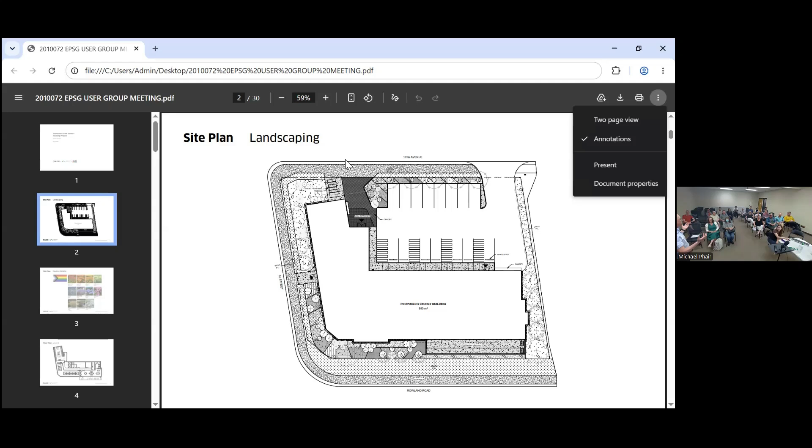For those that don't know me, I'm Jonathan Rockliff with Dialog, a registered architect, and I've got Tegan, a designer, with me today - she's been heavily involved in producing a lot of the design work. I've also got Ty here, who's a partner in charge of the project. Between the three of us, we can answer probably any questions you might have. What we're looking at first is the current site plan, showing the footprint of the building. As people know, we've got roads on three sides - it's kind of a unique site that way.

We did find out recently that we fall within the corridors area, which has some additional landscaping requirements that we're kind of stick handling right now with the city.

The idea is, I think we have a colored landscape plan coming up? We don't have a colored plan, but we have some images of the planting scheme.

Quickly, in terms of the site plan, the building is kind of this L shape. We've got the main entrance facing 101A Avenue, limited parking but some parking to the north, and the site is quite sloped, as everybody knows, and we'll see it later in the design.

As you go from the north to the south, how many meters difference? About 2 meters, I think. Yeah, so that's 7 feet or so from front to back.

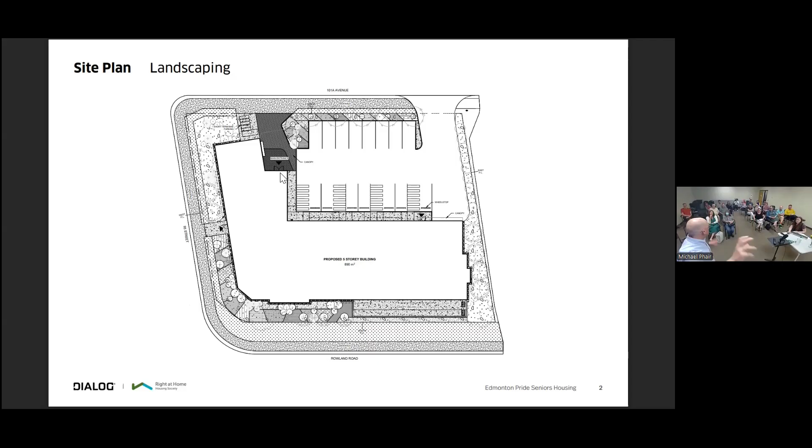We've got the main entrance into the building, a bit of an entrance plaza where we thought we'd get some seating in there and some planting. We've got some bicycle parking, which is a requirement by the city, adjacent to the front entrance.

As you come around the building, it's hard to see, but there's bigger trees and bushes and some landscape buffer between the streets and the building of different shapes and sizes. We've got a fire exit along 95th Street, and there's an outdoor amenity area just to the south in the lower level, to the southeast of the property.

Will the development permit dictate the landscaping? The zoning dictates the landscaping, so there's a requirement for trees and number of trees. They won't say exactly what needs to be planted.

I don't believe they indicate the species, but they might say like this many coniferous trees or deciduous trees. Our landscape plan that will be submitted to the city as part of the development permit will be our opportunity to propose how many of what will be planted where, and then that becomes what we get the permit on, so they'll come back and look for it.

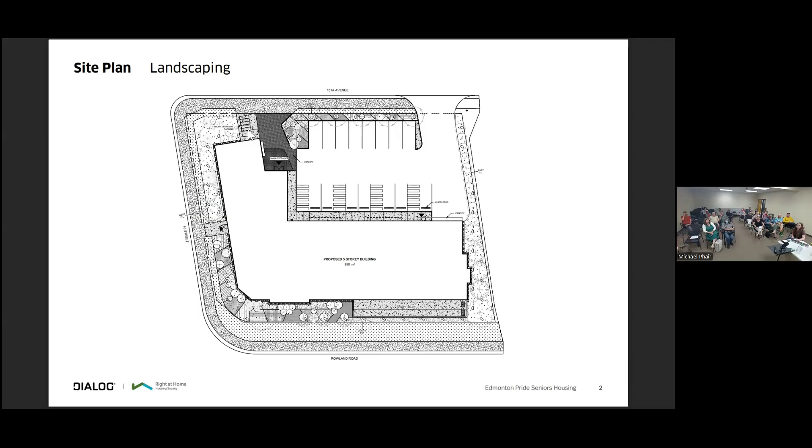So that's kind of the building footprint and the site plan, and we talked about the landscaping. Here is what we're calling the lower level, not the basement, because of the slope of the site we have a walkout basement. For the most part everything's underground, except for the area where we've got what we're calling the common amenity area, which is essentially a big multi-purpose room with a kitchenette, some bathrooms, some storage, and a sizable exterior space directly accessible from that. It faces south, so lots of sun. We're aware it's going to be adjacent to a busy road, so we've thought about fencing for security, but also privacy.

Is this your bike parking? Yes, so this space up here is dedicated to bike parking. You can see all the little stalls required for smaller bikes and bigger bikes, and this is in order to meet the zoning requirements.

Common on each floor is two elevators and a bit of a lobby space, and you'll see more about how that works as you get above the main floor. We've got a large storage area over here, some mechanical and electrical spaces in the middle, and a couple of exit stairs.

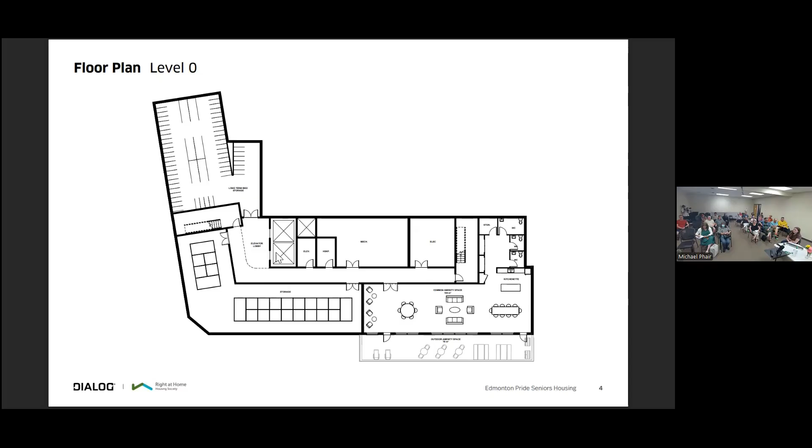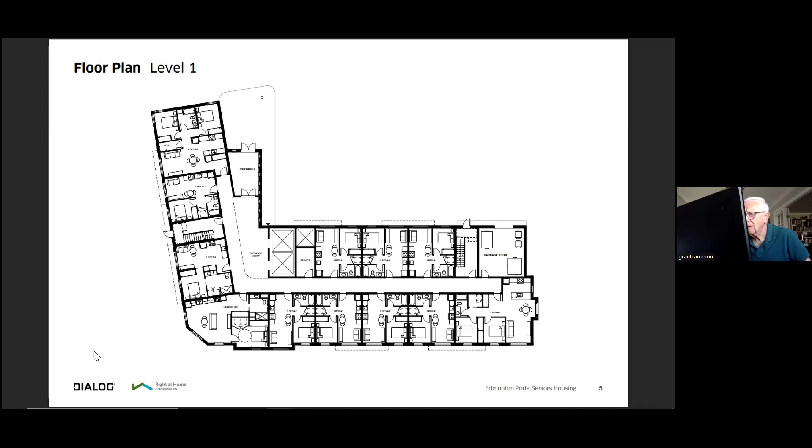All right, next level. Did someone online have a question? How does one see the slides, I'm not seeing them at all. Anyone else online? Yeah, we can see them, they're on the screen. If you go to speaker view, you'll be able to see it and then go to full screen. Okay, and where is that? It looks like a little stack of 9 squares. Speaker view - are you seeing all of us right now? I'm seeing the whole room. Okay, at least I was. You should - so they shared this screen. Yeah.

Well, maybe I'll keep going while you're figuring out your tech, if that's okay. Okay.

I don't know if we want to share these drawings after the meeting, but I guess we're okay with that. I think we're fine with sharing some generic ones as long as everyone understands we still haven't made it through development permit and building permit, so there may be changes as they identify issues. They're your guys' kind of drawings, but as long as we understand we may have to make tweaks and changes along the way, it'll give you the general idea of what we're aiming for.

So here we've got the main floor, and the main entrance coming in from the north. There's a nice size canopy over the front entrance just for shelter, and we've pretty much used every square inch of the space available to create suites - mostly suites. Maybe you can hover your mouse.

One of the requirements from the city was a garbage room, not exterior garbage. So in the northeast part of the building we've got a garbage room. On garbage day the truck will pull up, open the door, pull the bins out, empty them, put them back in. I think Right at Home is actually happy about that, from a safety, security, maintenance point of view as well.

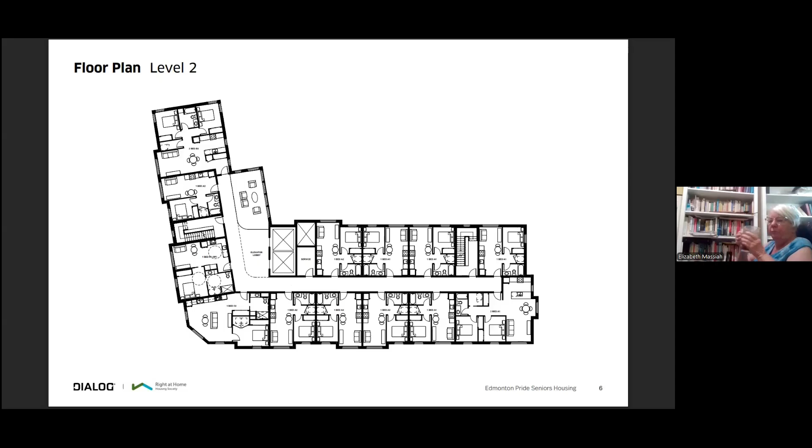Can you just tell us basically what the size of the suites will be? So it varies, but we have that on some upcoming slides, and we have a square footage of each suite type. But I guess the idea is on the upper floors, elevators are going to be a place where people come and go in and out of the building. That lounge area has a nice adjacency to that space, so I think it'll be an interesting, active space. There'll be windows to bring in natural light, not just to the lounge area, but into the core of the building where the elevators are.

As Tegan mentioned, when we look at the exterior of the building, you'll see we've extended out portions of it, and that does a couple of things. It provides a bit more space for the suites, and in some cases we needed that extra space, but it also helps create some visual interest on the exterior of the building.

So they have balconies? No balconies, no.

So I guess we can probably go to the exterior. So Jonathan, the size of the different units, how big are they - the one bedroom and the two bedroom, is that on an upcoming slide? We'll hit that, yeah.

Can I just, on the topic of balconies - one of the things we considered in this design was larger lobby areas and community space, encouraging people to get out of their suites where we've got those sitting spaces. Balconies, especially if anybody's watched the weather lately, can be not a fantastic space to use. Summer now we have all this rain, winter it snows, it's cold. So creating these spaces, whether on every floor or the main one in the basement, is usable 365 days a year. It doesn't matter what the weather is.

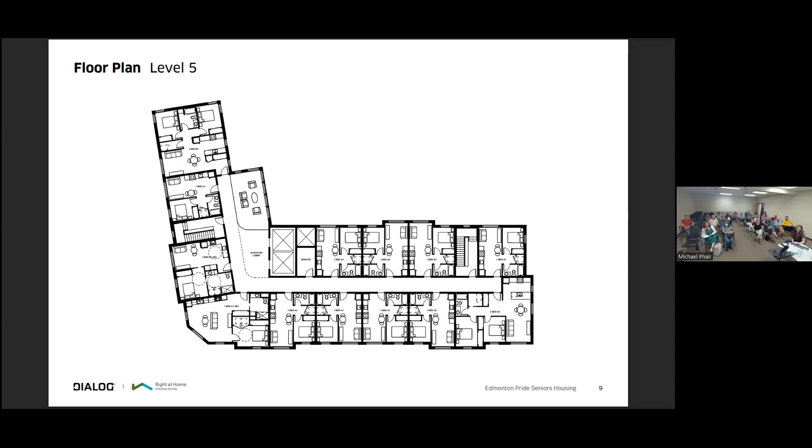Because we're getting money from the government, there's a requirement in the building code to provide adaptable dwelling units—kind of like barrier-free suites, but they don't have to be built barrier-free. They just have to have the ability to become barrier-free if needed, so we have 7 of them in the building.

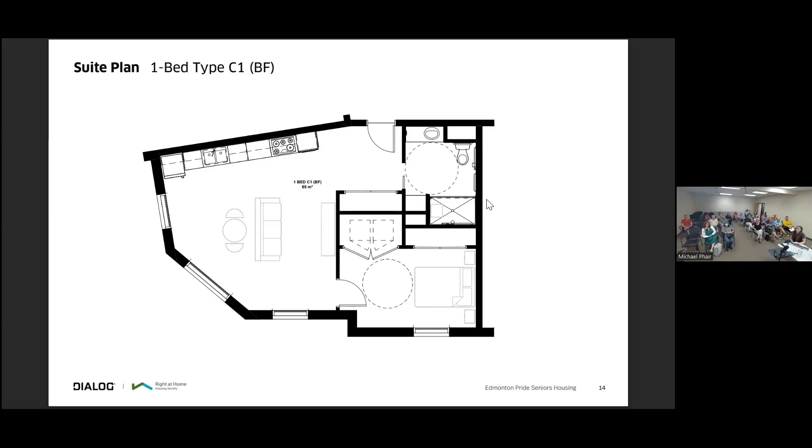Okay, this will probably be the suite everybody will want—this is the corner unit with lots of windows. Yeah, a bit of an odd shape, but... I can't remember, is this the same all the way up?

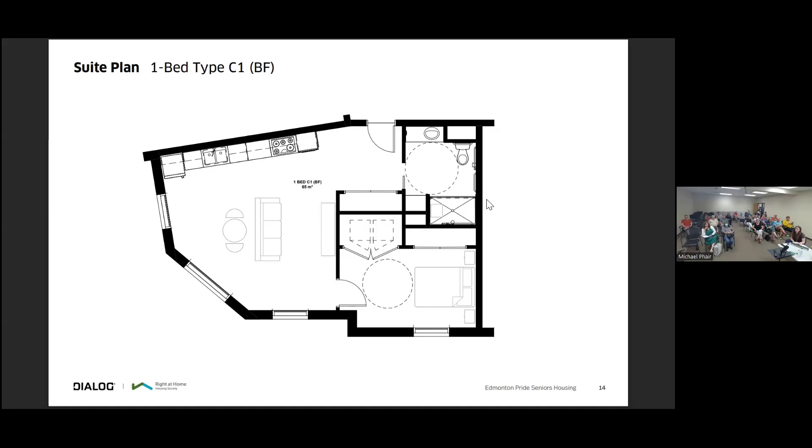There are some barrier-free versions and some non-barrier-free versions. Currently the layouts are the same, but we might change that. What was the square footage of this one? This one is 65 square meters, so approximately 650—675 square feet. Thank you. And yeah, there's a nice big closet as you come in, right there. Same layout.

Here's our two-bedroom. It's in the southeast part of the building, so it benefits from two exterior walls and lots of light. This one has a storage room where we would put the stacked washer dryer. Do any of those windows open? Yes, albeit building code limits it to 4 inches of actual opening space.

They could be sliders, they could be swinging, but can't have more than 4 inches of open space—you don't want anyone to fall out. Yeah, it's kind of a... wow.

We are putting air conditioning in the building though. Oh, perfect, so you're not reliant on your windows for cool air. That's nice, I was like, I don't think you're super worried—unless you could climb out that window later.

Air conditioning in the building - in the suites as well, or just the hallways and common areas? We are still value engineering the mechanical, but we are working towards making it nicely acclimatized for folks.

What's the square footage on this one? This is about 72 square meters. And how many of those units are we going to have? We have 5.

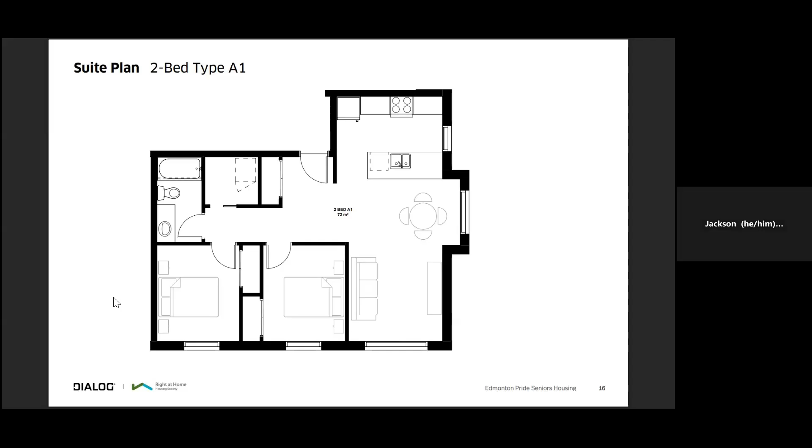Because, I mean, not to call out Michael, but Michael's not the tallest person in the room. So I'd be wondering, especially because common injuries are shoulder or hip injuries, so the clearance to pull stuff out of the dryer would render a stacking washer dryer useless if you can't reach it. Yeah.

That's great feedback, we'll make note of that mentally for when we start to select the appliances. Thank you. I guess on that note, I think all the suites have dishwashers. Yeah, that's common - all suites have a dishwasher.

Marisa, would you be able to touch on it all? I think one of the things is we've tried to provide a range of unit sizes and unit types here, going from very compact to larger, more market type sizes. I don't know if you'd be a good person to expand on the relationship between affordability and square footage a little bit, and why we tried to come up with a mix.

Well, there are 1.5 million reasons we try to come up with a mix, but at the end of the day, when applying for grant funding, there are caps on the dollar per square foot, dollar per unit, and dollar per build. So we need to be cognizant of that when the province is funding affordable housing - they're maybe not funding executive suites. But in a mixed market building where we want to attract people who want affordable housing as well as regular housing, we try to be thoughtful about not making them too different, but also having some variety.

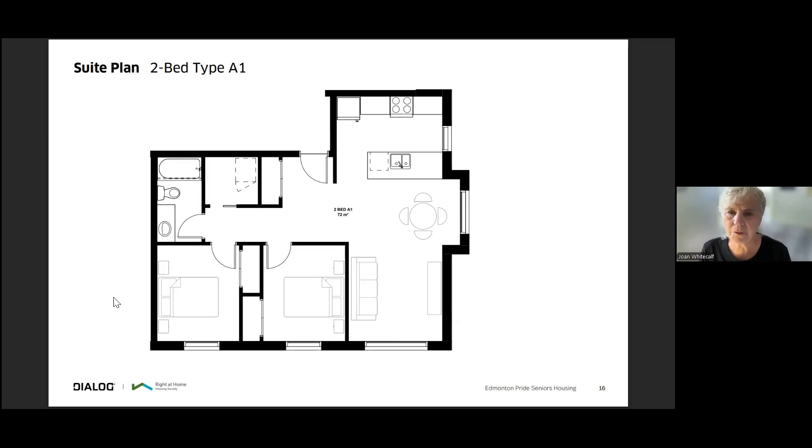In every suite, or just some? It depends on the design—like the one that's up now, you can see there's a pocket door on the laundry room, I think in the barrier-free suite. The barrier-free suite has them. For bathrooms, we find that people really don't want a pocket or sliding door for privacy, because you hear absolutely everything. And for bedrooms, folks tend not to prefer those as well, but we have placed a few. Okay, yeah, thank you.

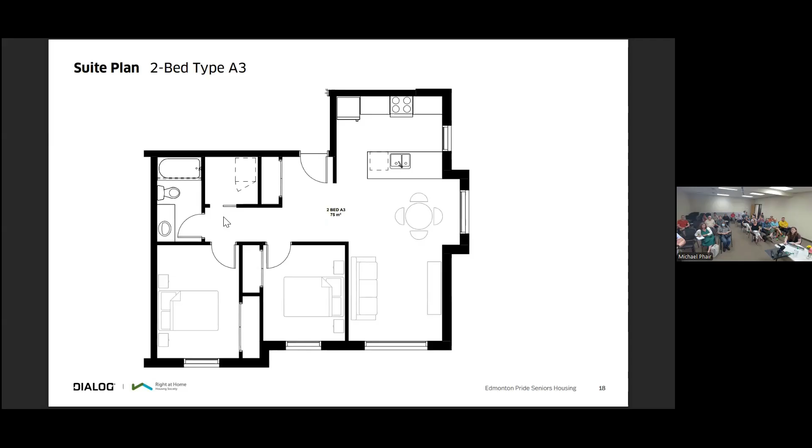It's 5:45 p.m. Okay, what time do we have until? You're done in 25 minutes, but yeah. Hang on, we can shave some time off. Sage is very, very kind and generous, they support us greatly, but there is a volunteer sitting upstairs waiting for you to leave. So if you could leave by 10 after 6, that would be wonderful.

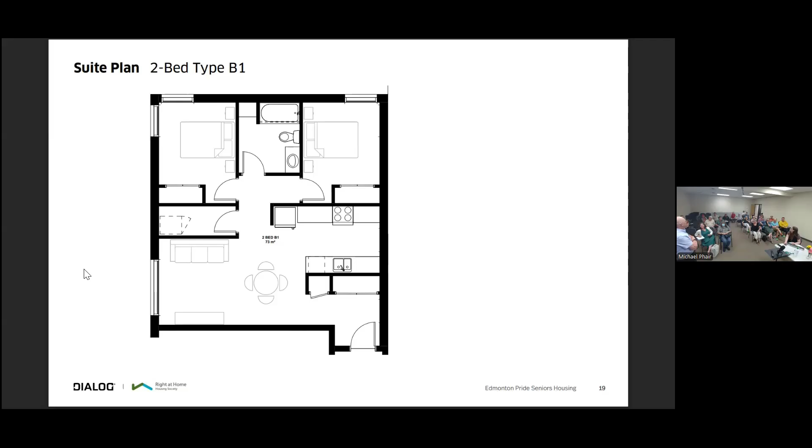Okay, so we have a fair bit of agenda to get through. Sure, can I just say one more thing? I apologize, I was supposed to say this - I forgot that I had a dinner appointment tonight, so I have to leave in about 10 minutes. Can somebody hand the PowerPoint thing?

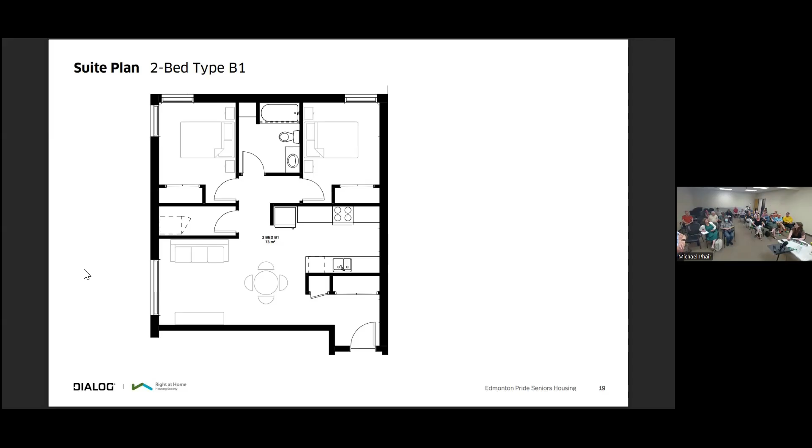Yeah, this is another one of the 2-bedroom units. This is sort of at that top end of the most northwest part of the building, so a different layout to the other 2-bedroom.

Can you go to the rooftop? It's just a roof, there's no top. What a waste, I know - a beautiful piece of land that has views in every direction. I know, I know, awful.

We are thinking very much about the cost of construction. And yeah, I hear you - is it possible to create it now so that later on you could turn it into something, like create the structure? Because you've got to have your mechanical up there, right? So it has to - our mechanical is in the basement. I think it is something we've done before where usually the problem is not a structural problem, it's usually just that there's a cost associated with coming in, you'll need to put like a patio paver kind of system on pedestals or something that don't damage the roof membrane.

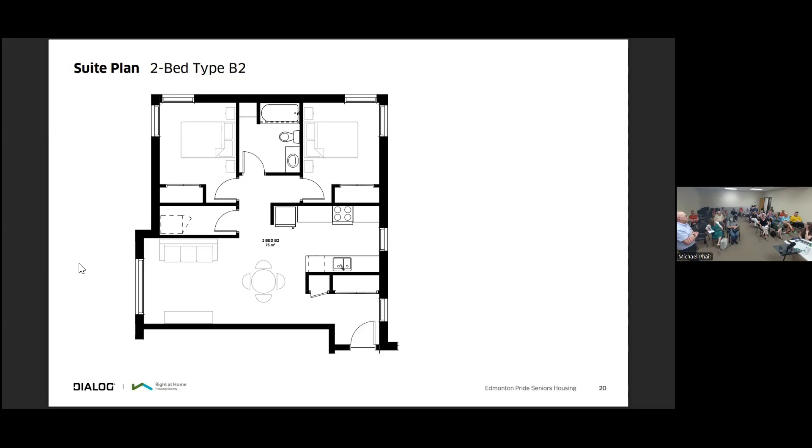Maybe, I think we've done all the suites, right? Yep, that's all of them.

Okay, so a little caveat before we look at the elevations, these are a work in progress. We've been rushing to get something put together for our development permit application. Our intent is to submit this for the development permit, but then to come back and look at it a little bit more. I think the materials are close to what we want to use, but maybe just some of the colors and some of the detailing and some of the exterior expression around color.

And how we might want to do that. So that will come, but right now we're just trying to get it in for the development permit.

So yeah, I don't know, Tegan, if you want to just show where some of the materials we're thinking of. And you can kind of see some of the elements where we bumped out the building to provide a bit of a visual break on it being just a box, right?

And we do have to go through a bit of an extra hoop when it comes to getting a development permit. We have to go to a group called the Edmonton Design Committee because it falls within their purview in this part of the city. So they will have expectations above and beyond your typical development in terms of the urban design.

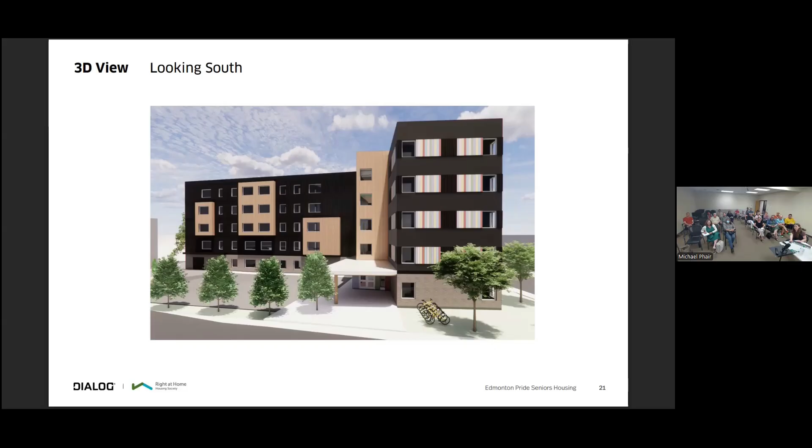I ask about the layout. Ask Liz to mute herself.

I once lived in an L-shaped building. Not really, Hillary, I'm actually in a Zoom meeting. I thought we were going to talk tomorrow. Stop, you expect it, we can hear you. Okay, the current way out. Oh, she went, she got it.

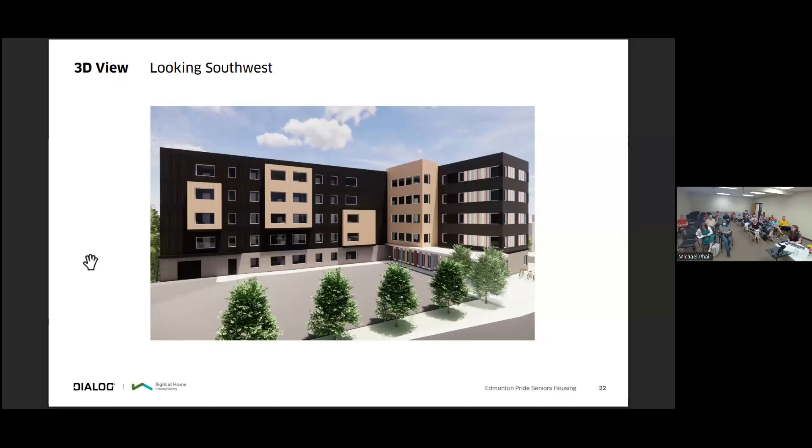So I'm just wondering about the flow of people around the building and what the consideration is for that sort of part of the L where you might have people wanting to maybe find a private space away from the busy street, and police and all those things. I'm assuming you mean people who don't live there. Yeah, people who don't live there, where they kind of look for a place where they're not gonna be visible to camp out or whatever. Is that why the entrance is in that crux of the L, or what's the sort of thought there?

Yeah, I guess, definitely thinking about keeping or limiting or eliminating spaces where people might come where we don't want them to. And so when we're thinking about the landscaping, that's definitely a consideration. I mean, this has 3 public faces, so I think that will help. Typically eyes on the street, the views of people inside the building seeing what's going on outside, also be part of that solution.

That's 101A Avenue there, so I can help a little if you want. So when we talked a lot about this building, we actually took that into consideration, so that big gray square area is your parking. Depending on people moving around, you're gonna see a lot of coming and going through what appears to be a vacant courtyard, but it's actually the parking. But then all of your units also overlook that courtyard, as well as where that kind of lighter brown area is in that one corner, that's actually going to be your lobbies on every single floor.

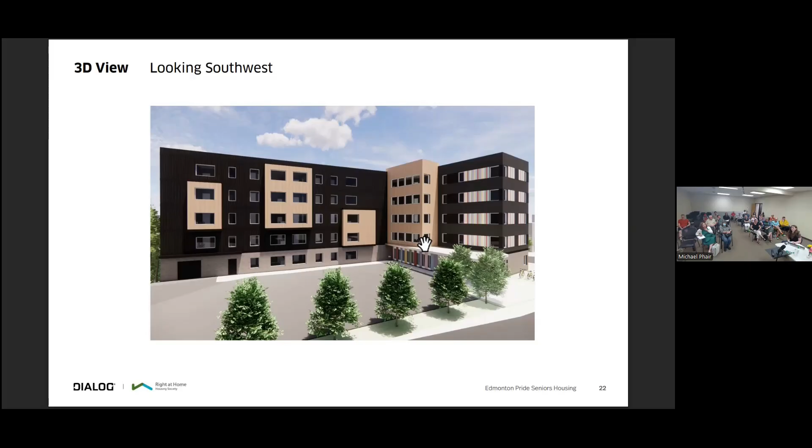Like if garbage blew into the parking lot, I'm going to pick it up, or somebody dropped something in the hallway, I'll give it a quick spot clean, that type of thing. But yeah, it's really designed so that all of the units, as well as the common spaces, overlook those areas, in the hopes that by the 5th floor, you're not going to have your blinds closed all the time. You're going to have them open, you're going to want to enjoy some sunshine. And even at the ground level, not the basement or lower level where the bike parking is, that's actually apartments on that level, so you've got people there who are going to hear noise or see movement. We'll also do some hopefully really nice lighting in that area.

Right, does that answer things? Okay. Oh, got another hand online. Joan, you've got a question?

Yeah, I'm just wondering about the cladding. I just watched this documentary about a building that burnt down in England years ago, and the problem was with the cladding - it was some super melty thing that went crazy when the fire happened. So I'm just curious, it's in my head, cladding - I'm just wondering if there's any fire safety concern.

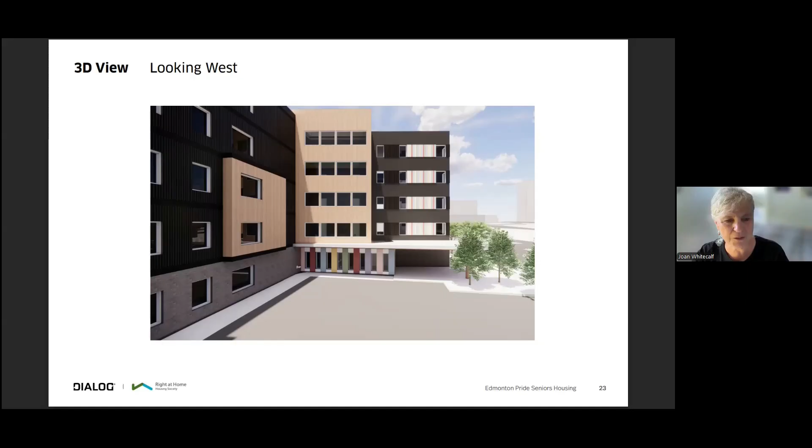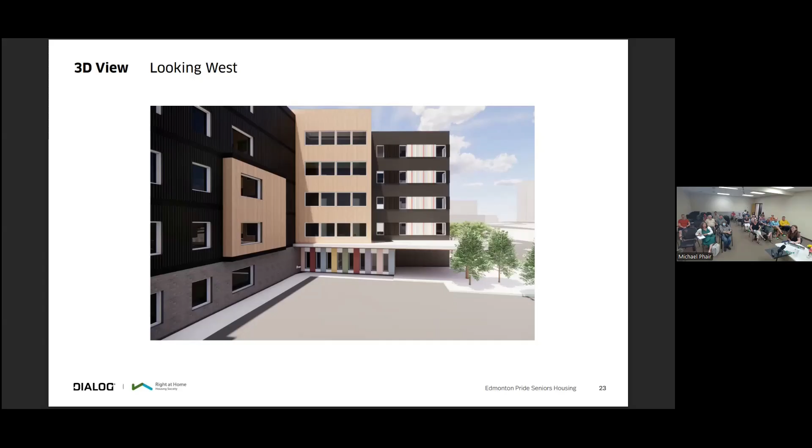Yeah, no, you won't have to worry about that. Okay, that's good, because it was horrible. Thank you.

Yeah, but it's nice from that side. These are good views here, just to kind of show how the site slopes. We haven't shown enough detail of that common amenity space, but it will be fenced in so it's secure, so people from the outside can't take furniture away or find a way into the building. More detail on that is to come.

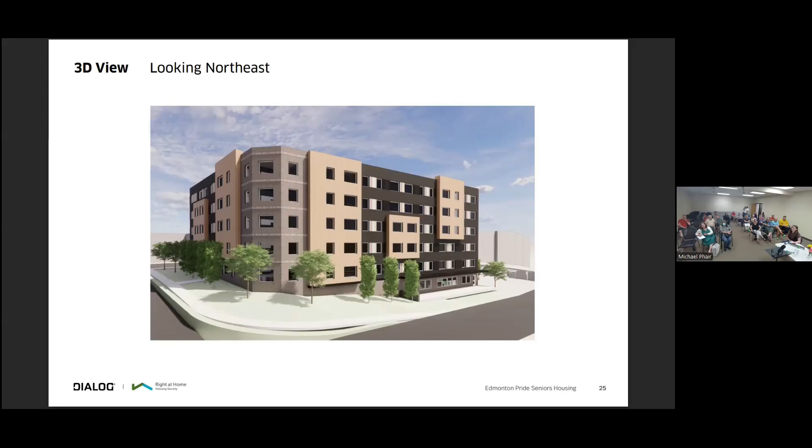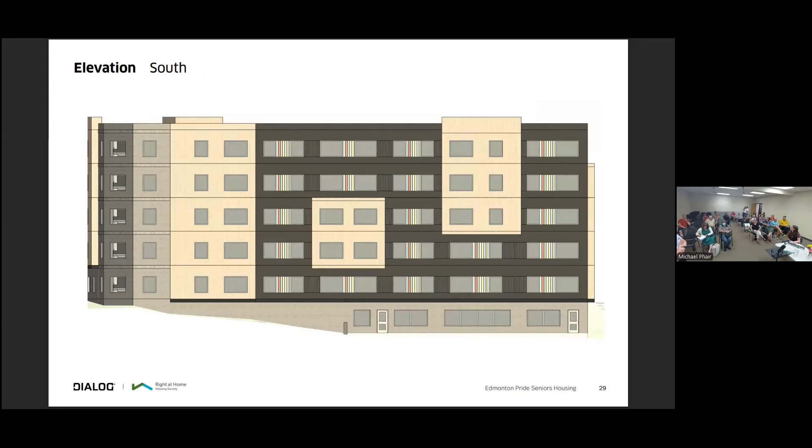Okay, these are just the elevations. Can you tell me what elevation on our building would be where the arts co-op is? That would be to the east of our building. How many stories? They're townhouse style, are they not?

Yeah, they're townhouse style, but their backyards are really sloped. I'm just wondering where you'd have a clear view, what floor you would need to be on in our building. It would probably be around the 3rd floor and up that you would see over top, and in every direction.

Well, I guess I can't remember what's to the north. There's something taller - to the north is the Hecla. But the Hecla's kind of on that one corner, and I believe when we did some renderings, there should be a bit of a north view - don't quote me on that, I spent a lot of time looking at things. And then west is a building of condos, and south of you is fairly short - that pinky orange area, they're quite short.

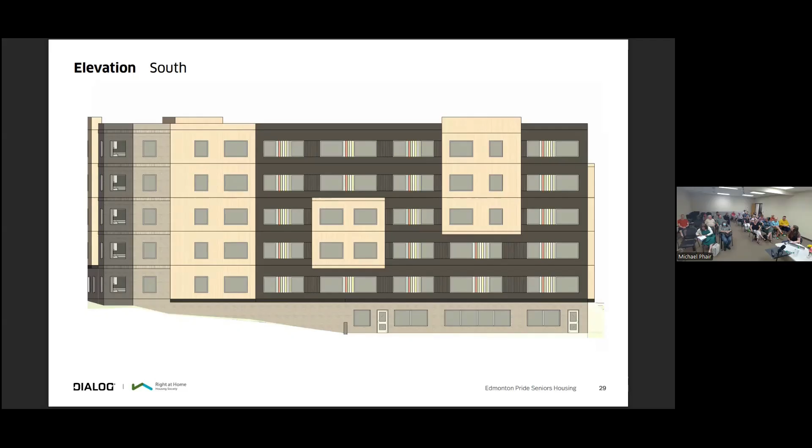You're talking about the Arts Co-op apartment building, it's at the end of the block. Yeah, I think there's a space in between - is there almost not a half block down? Yeah, I know people who live there.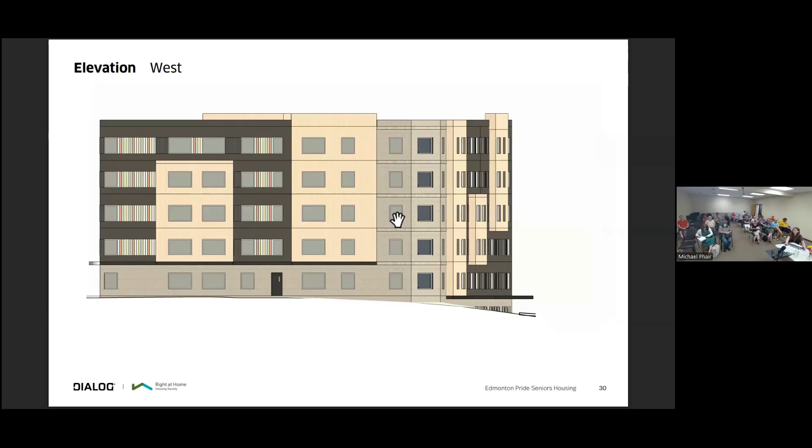So in the interest of time, is it possible that if we have further questions, we collect them and forward them on to you? I think it would be great if you could get them all together before sending them. We'll provide that - we've got a contact on our package website. So if you go to the Edmonton Pride Seniors Group website, if you have questions, we could gather them and then forward them on to you. Good, okay, thank you for that.

All right, so did you need us to stay for any of the other parts of the meeting? I don't believe so, somebody has to run that. Okay, yeah, you don't want to be doing the PowerPoint. No, you have to stay. Did you drive together? I can stick around and help if they need a hand. I think we can figure it out because you don't have a PowerPoint or anything. I do not have a PowerPoint, so I can. Patrick does though, for the camp. Yeah, okay, all right, so or I'll figure that out. Right? Yeah, yeah.

I think they're all on the desktop already. Is yours been put on? As far as I know. Okay, all right, thank you very much. Oh, sorry, get it out of the way.